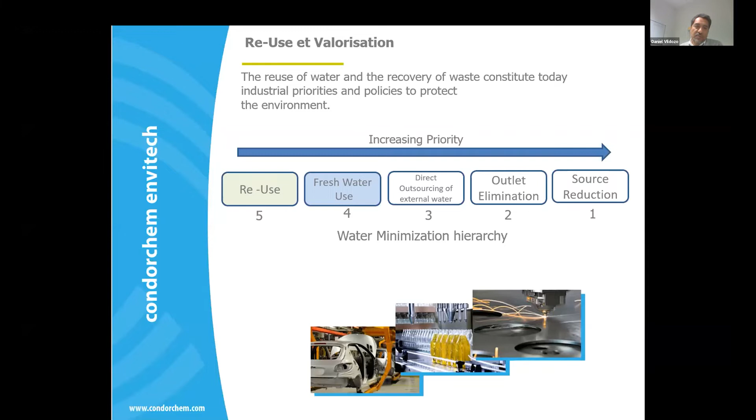So at the beginning of Condorchem, 10 years ago, all the projects that we made were focused just on the treatment at the end, and that's all. Let's treat, let's bring the pollution down to the legal levels of the regulatory authorities, and that's all. And we forget the problem. Those were the projects that we made at the beginning. But since 10 years ago this was changing, with a different point of view of how to attack this problem.

And the priorities have changed. So what we have focused on since 5 years ago in the projects that we made worldwide is not only water treatment at the end of the industrial process. We don't just have to treat the pollution in the water. We have to reuse the water that we are going to treat. So that was changing, and it is changing very fast: this different mentality in the demand that we have from our clients.

Just for example, last year, in 2020, 70% of the water projects that we made at Condorchem was from reuse. That means that we were not only focused on the demand of the client for the treatment of the water, but also on how we can reuse

this water, because now there are many industrial companies that were told that in the next years they have to make a reduction of the water that they use. For example, right now we are talking with one company here in France, and they told them that in the next 3 years they have to reduce 30% of the fresh water that they use.

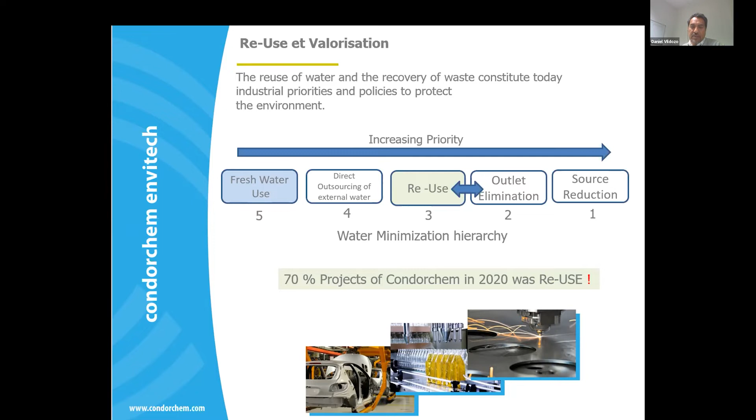So this is an example of the problem that different companies can have now in wastewater treatment. That's the reason for the importance of what we make as a solution as a company. We work in ZLD, that means zero liquid discharge. ZLD is a technology that applies when we have to treat water, and the higher percentage of the contaminated effluent is water. So that's the first

condition, and this water is contaminated by different things like salts, chlorides, nitrates, sulfates, phosphates, or different kinds of metals, or different organic substances of all kinds. So when we have water contaminated with these kinds of compounds, we can apply what we call ZLD technology.

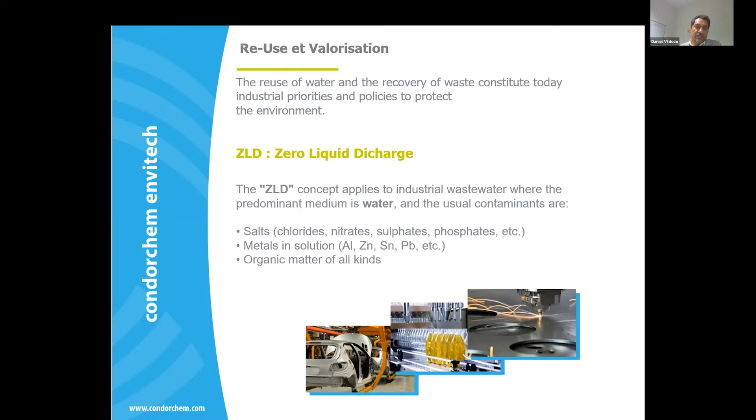ZLD technology we can use, let's say, in almost every kind of industry. In this presentation, I mentioned a list, for example, industries that have emulsions, coolant fluids, process water from different kinds of industries, from chemical, pharmaceutical, cosmetic, working baths, galvanic processes, graphic arts,

printing companies. And we can also use it in leachates from municipal solid waste. We can use it in biogas processes in order to treat the digestate, and in the beverage and food industry that use large quantities of water, energy generation, and the paper industry.

And one application that we didn't put in this list, but which is increasing a lot, is the treatment of the effluents that come from recycling the batteries of electric cars. These are some problems that we can resolve with zero liquid discharge. In these effluents we are going to have a mix of water, acid, and metals, and we can use this technology in order to treat and recover the acids on one side and the metals on the other. And we already sold 2 pilots to treat this.

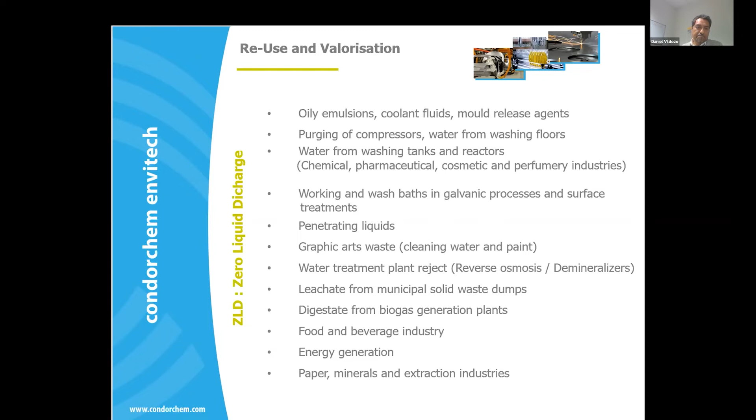I'm going to explain some steps that we need in order to make the ZLD process. First of all, we have to make a pre-treatment of the effluent. It depends on what kind of effluent we have. Before going to the ZLD technology, we have to pre-treat this effluent, and we can do it with different technologies. A classical biological process, if we have a lot of organic waste inside.

If we have a lot of particulate matter, we can use chemical processes like flocculation or precipitation, or we can use different kinds of filtration in order to separate the particulate matter in this effluent before we send it to the ZLD. This part is really important, because if we make a good pre-treatment, we can avoid several costs that we can have in the ZLD treatment.

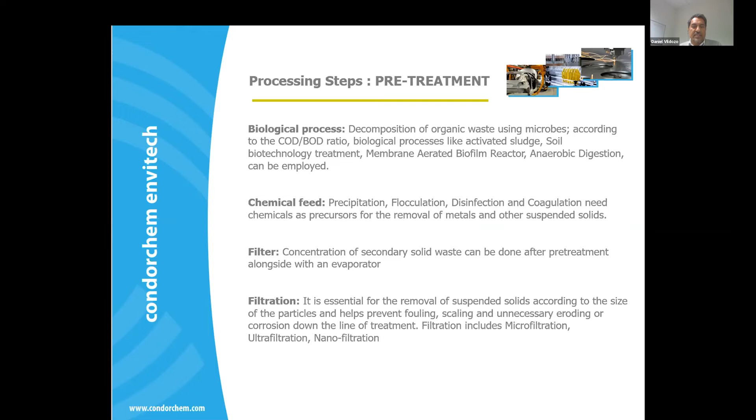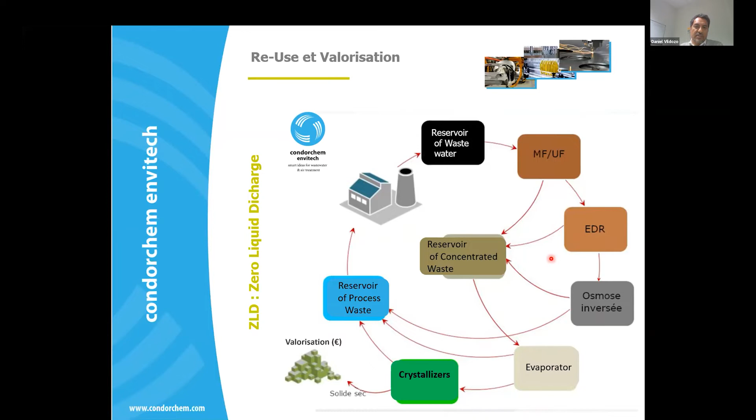So this is a conceptual explanation of what zero liquid discharge is. Let's say those are all the steps that we can have. But in the most classic installations that we made as Condorchem, and that we can find in zero liquid discharge, we have these three technologies that we can use.

We can see here that the first step is going to be reverse osmosis. We are going to treat a large quantity of water here, we are going to obtain clean water, and we are going to have concentrated wastewater here. This concentrated wastewater we are going to send to an evaporation system. In this system, we are going to have a second step of concentration. So we are going to reconcentrate the wastewater.

In the first membrane technology phase, we are just going to concentrate. In this second step, where we use an evaporator unit, we are going to obtain a liquor of the pollutants. We are also going to obtain clean water on one side, and on the other side we're going to obtain a liquor that is really concentrated.

Sometimes we can stop the process here, and sometimes, if we know that we can make a third step in order to valorize the pollutants that we obtain, we can go to a third phase, which is crystallization. In this crystallization system, we are also going to obtain treated water, but we are going to obtain solids. These solids that we obtain from this unit we can reuse, or they go to an external disposal unit.

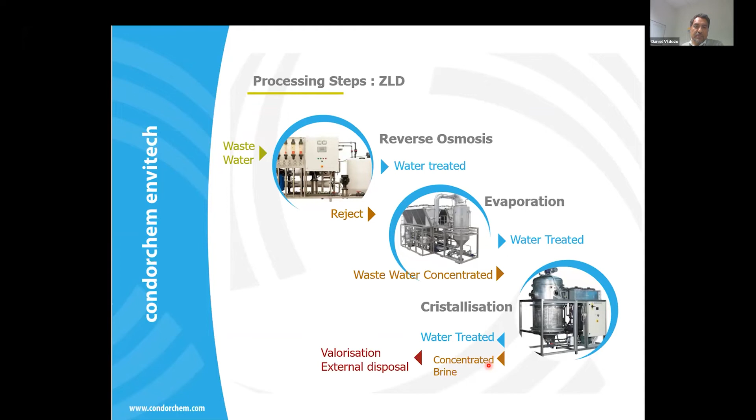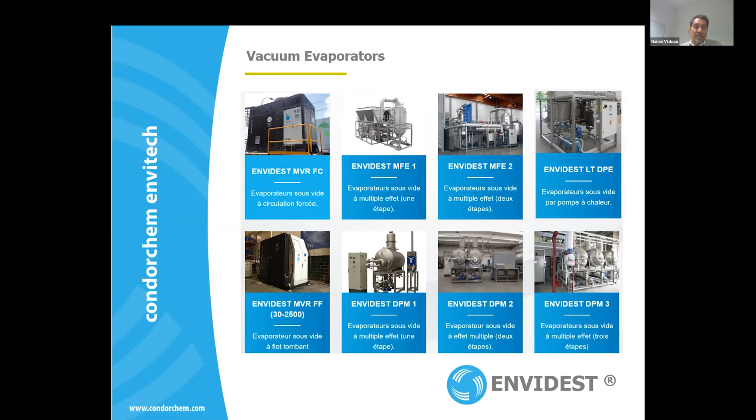And these units can run on electrical energy or thermal energy; we can just make an evaporation and obtain clean water, or we can make it in order to obtain crystals, solids. So this is why ZLD is very difficult to install, because there is a lot of engineering, a lot of laboratory tests, and that's what we're going to show after. There are a lot of pilot tests that we have to make in order to choose the best technologies, because we work a lot with investment costs, in order to show our clients that ZLD can be applied to their process, and what cost they're going to have if they apply this technology.

That was for the evaporation systems, and this is also for the crystallization units. As you can see, there we have a lot of technologies. We have some models with which we can obtain slurry effluents, and some models with which we can obtain crystal solid salts, depending on what the target of the product is going to be.

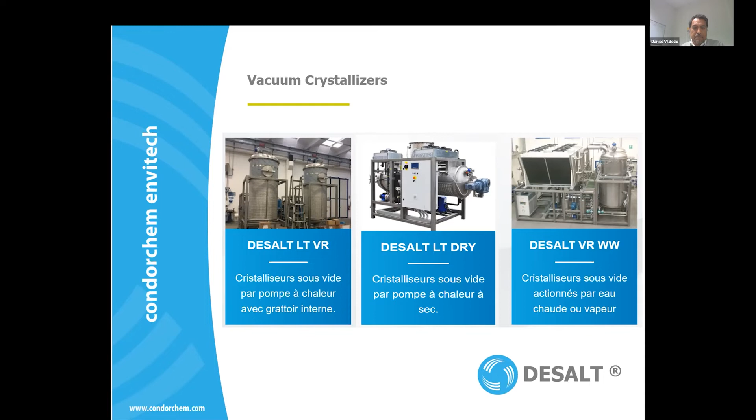But let's talk about what, for you as a research institute, is your interest: where we can find the innovation in the ZLD process that we can apply. So the emerging new technologies that we are searching for as a company right now in order to improve zero liquid discharge are in the first stage that I explained before. That means that we know that evaporation and crystallization systems are very physical technologies, but we have to minimize the size of this equipment.

So our first stage has to be more performant than the technologies that we have until now. And there is some development, and there are a lot of people working in order to improve this membrane technology that comes at the beginning of the ZLD process. There are some advances in membrane distillation, as we can see here, and there are some advances in new materials for forward osmosis. And the last technology with a lot of studies is electrodialysis and reverse

electrodialysis technology. So these are, let's say, the emerging new technologies in order to improve and be more effective in this first stage, in order to have a better performance of the zero liquid discharge.

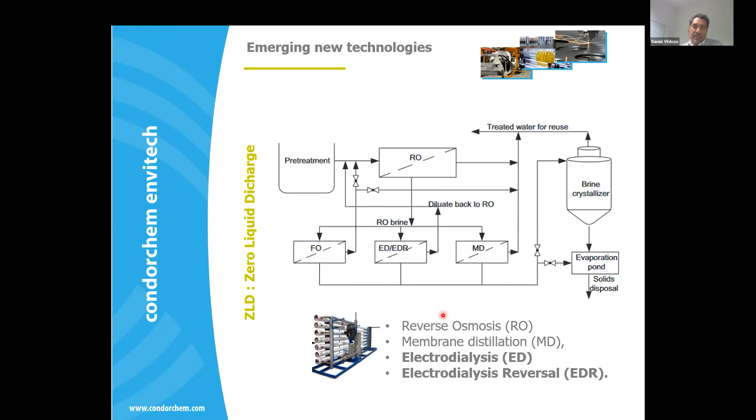We can talk about some advantages and disadvantages. Let's talk first about the disadvantages of ZLD. It's a high energy consumption. This is a problem. High capital cost of investment when we have to buy the units, because we have to treat a very high volume of water.

In some cases, we have to install pilot scale tests in order to validate the full scale performance, because we are treating a problem with a mix of many technologies that are installed one after the other. And sometimes when we don't have experience with this new effluent, with a new matrix and new pollutants to treat, we have to start a pilot scale in order to determine the efficacy, and also the investment costs that we can have.

It's a project in project time. To apply this kind of solution, for a project 60% of the time is going to be research, laboratory tests, and pilot tests, and only 30% the installation and fabrication of the units. That is the reason that we like to apply a ZLD project, because there's a lot of research in this. That means that we have the units, we have the technology, but we have to be sure of how it's going to work. So there's a lot of research in the laboratory.

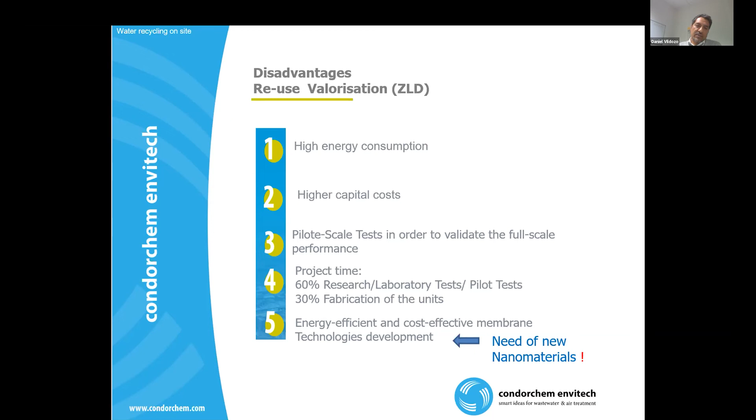So this is what we are searching for now: how we can improve these membrane technologies with new nanomaterials that we can put inside in order to achieve a better performance. So we are going to go down with the cost and the energy use that we need in order to apply more and more the ZLD technology. So that's the point where you can help us develop this kind of new materials.

Let's finish with the advantages of the ZLD. It's an effective solution. That means that in many cases we really can obtain clean water that can be reused in the process. So that is something that we can really achieve, treating different kinds of wastewater from different kinds of companies.

We can treat very large volumes of water. Thanks to the membrane stage system, we can treat very high volumes of water, in order to reuse and to obtain large volumes of water to be reused in the main factory.

We can reduce the cost of managing wastewater for disposal. Sometimes our clients have to send it to external disposal and pay a lot for this disposal, and we can avoid this with this kind of technology. We can also recover products. That's what we are doing a lot in other projects with our clients. We search how we can recover the pollutants and how we can reuse them, or how we can valorize them.

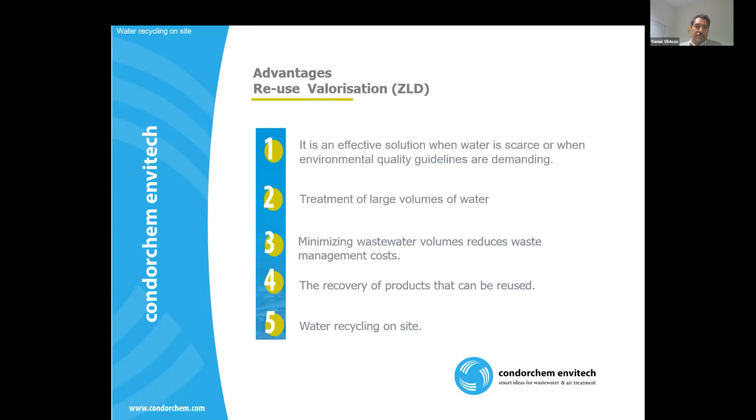Thank you for your time. I know that this is the last conference from me today. So I hope that if you visit Lyon, just pass by and say hi to Condorchem Envitech Lyon. It's a really nice city. We don't have the sunny days you have in Barcelona, but it's a very nice city where you can drink good wine and have nice French food.